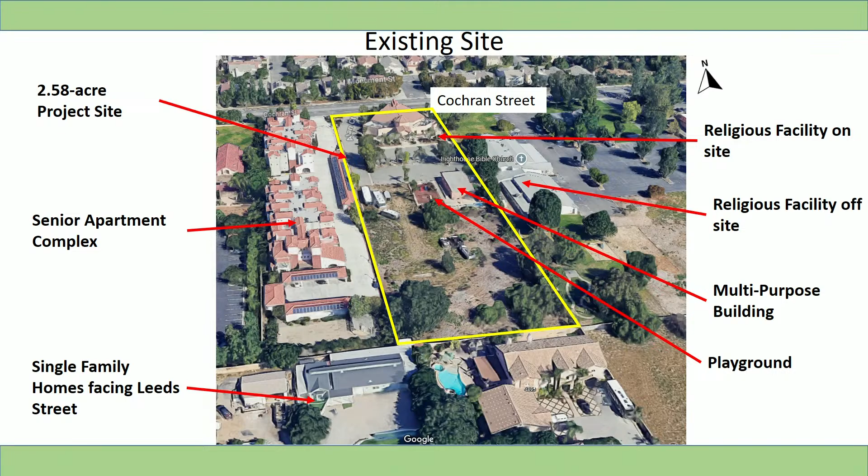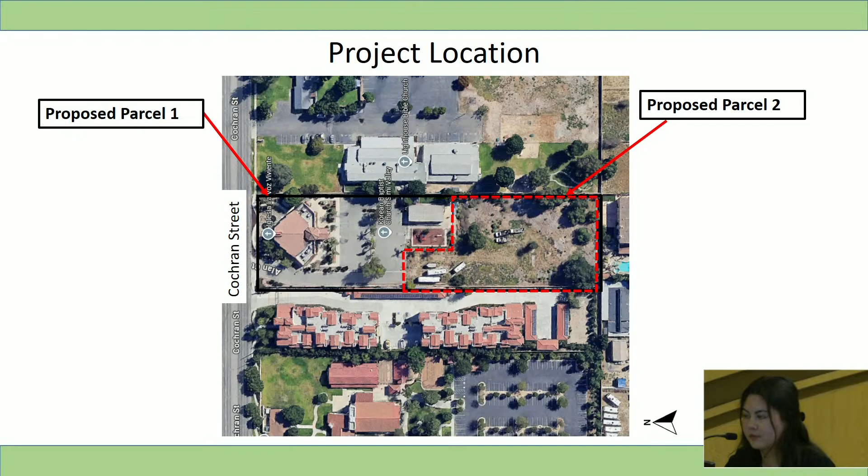The 26-unit townhome community is proposed on the 1.2-acre southern portion of the site, which will be accessed by a shared driveway from Cochran Street. The units will be spread amongst 4 buildings, and a tentative tract map will subdivide the development to allow for the sale of the 26 units.

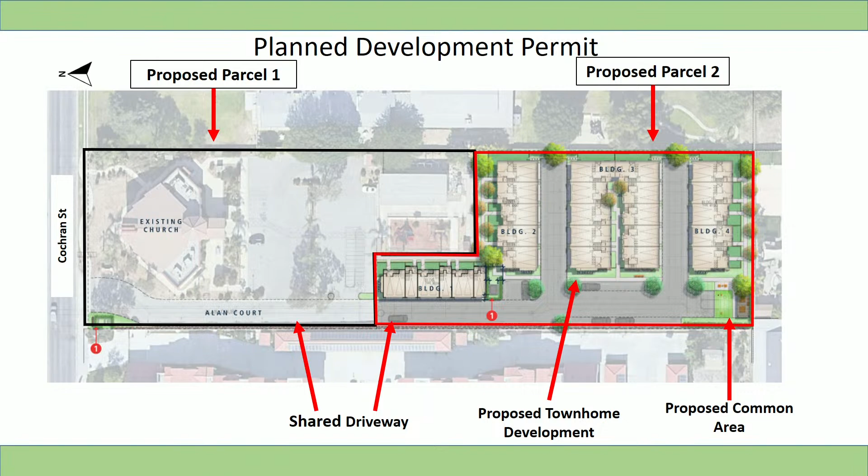The project will also add approximately 11,800 square feet of new landscaping throughout the perimeter of the site, along walkways and within private yards. A common outdoor space will be located at the southwest corner, which will include an active lawn area, barbecue, picnic tables, and benches.

The site currently has 22 mature trees, and 14 of them will be removed, none of which are oak trees. The applicant will mitigate the loss by planting replacement trees of equal value throughout the project site or pay into the city's tree mitigation fund.

The buildings are each 3 stories and 38 feet tall, and the design combines early California and Hacienda architectural styles with red tile roofs and light-colored stucco walls. The design is broken into 2 schemes. Scheme 1 will have darker colored accents under windows and darker colored garages and front doors, while Scheme 2 will have arched doorways and wood-like balcony siding.

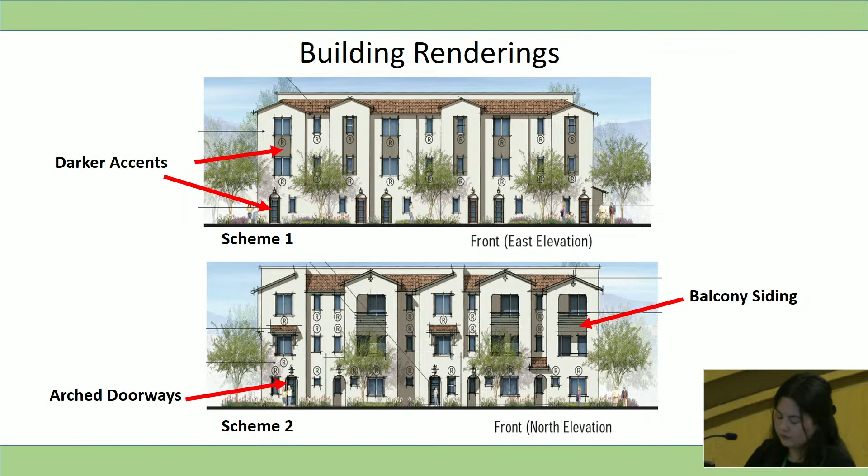The units will be a mix of 1 to 4 bedrooms, ranging in size from 725 square feet to 1,710 square feet, as shown on the table. All 3 of the 1-bedroom units will be designated for qualified moderate-income homebuyers in exchange for receiving a density bonus and development incentives in compliance with state density bonus law.

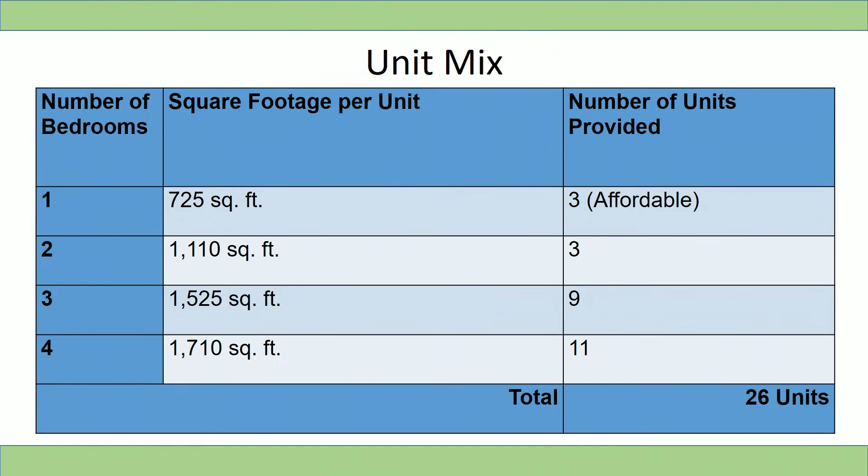The residential high zoning on the property allows 24 units at base density. The applicant is providing 3 affordable units to achieve a density bonus of 2 more units. This also qualifies the project for modified parking requirements, 1 development concession, and multiple waivers, as long as the waivers do not impose a life or safety hazard.

The applicant is requesting the following 6 waivers. The first waiver request is to reduce the required front yard setback from 43 feet to 3.5 feet at the north property line. The required front setback is shown here in blue and the requested in red.

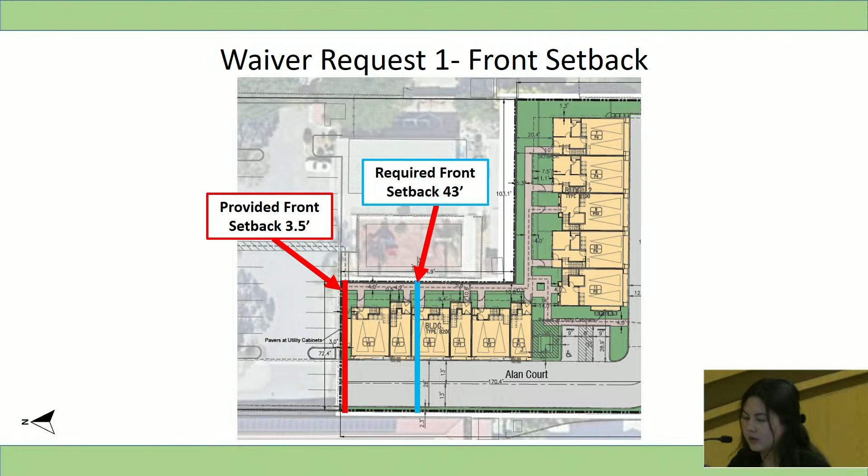The second waiver request is to reduce the required side yard setback from 15 feet at the east property line, as shown in blue, to 9.8 feet, shown in red.

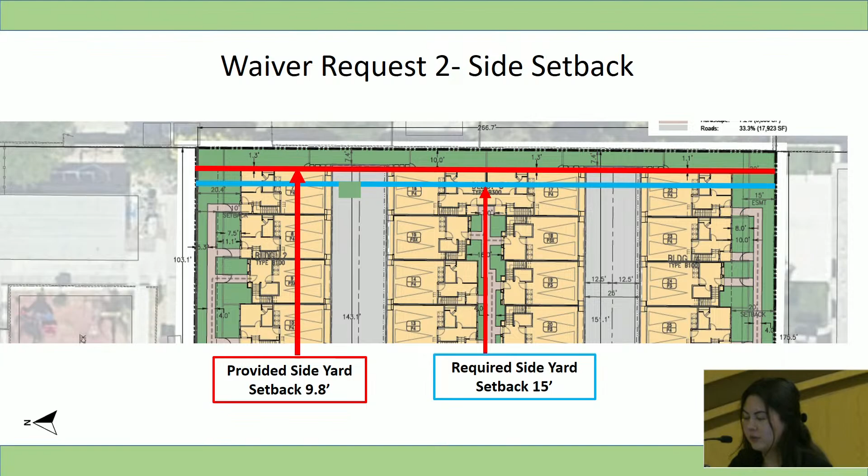The third waiver request is to reduce the required separation between buildings from 20 feet, as shown in blue, to 14 feet, shown in red.

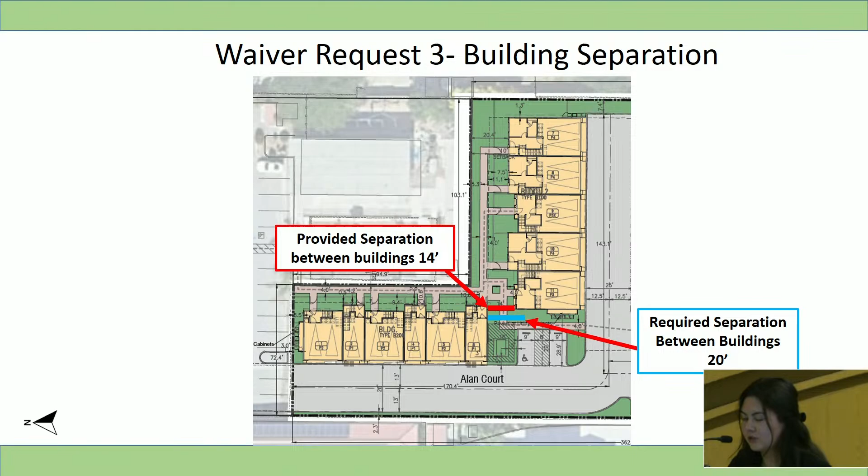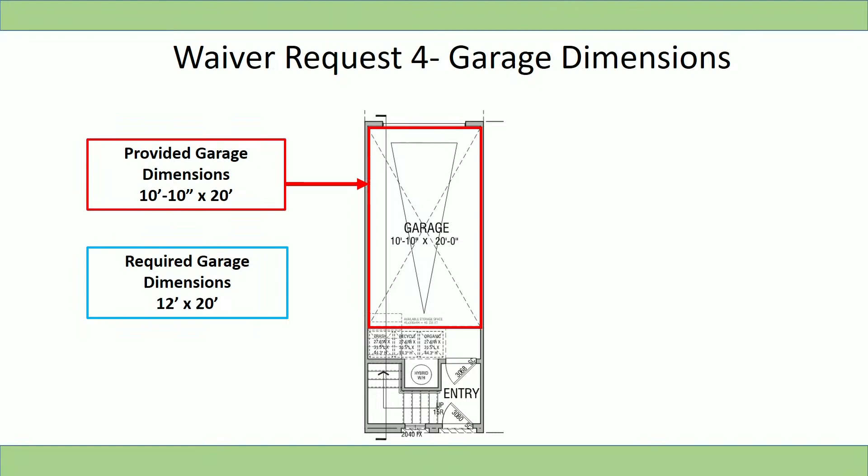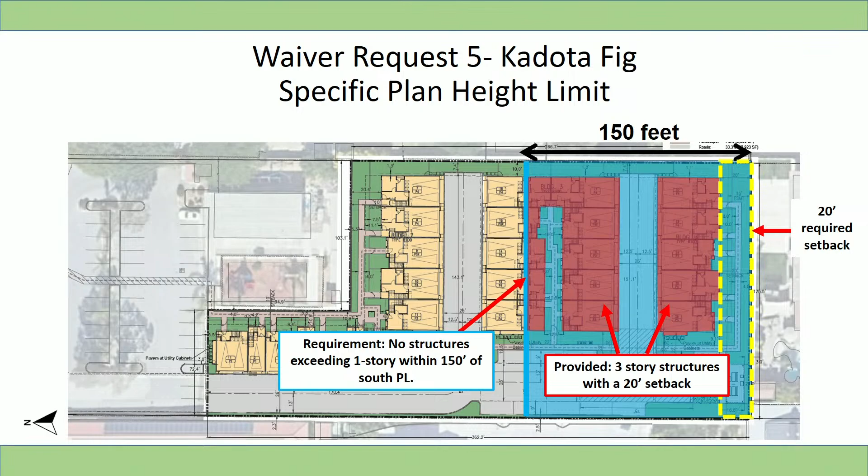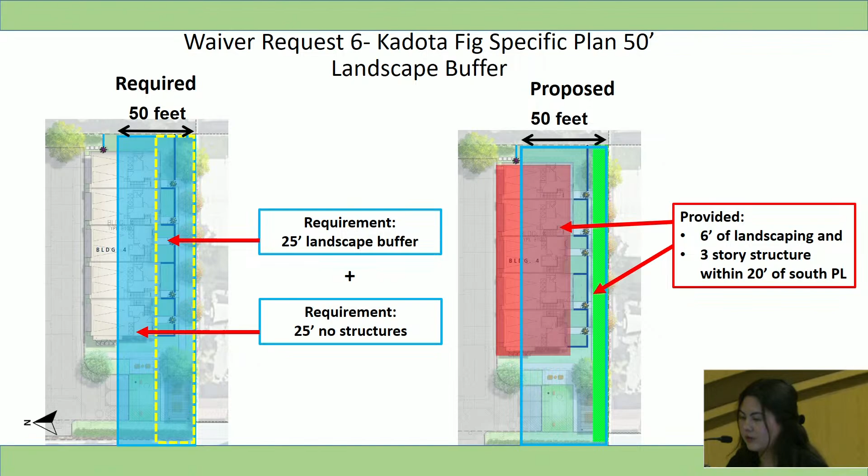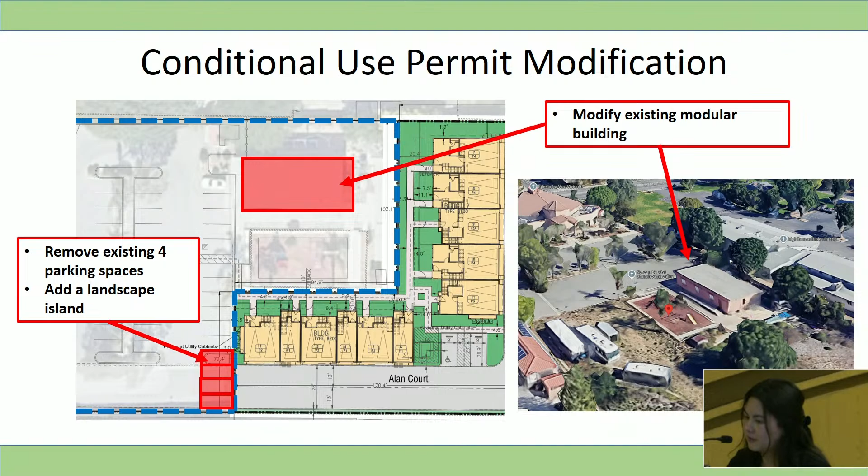The project is categorically exempt from the California Environmental Quality Act pursuant to CEQA Section 15332 for infill development.

We would also like to note that PD Condition A19 on page 31 of the report is not applicable to this project and was left in error. Staff will omit this condition on the resolution to City Council.

Staff recommends that the Planning Commission approve the modification of the conditional use permit and tentative parcel map for the existing religious facility site, and recommend to City Council approval of the planned development permit and tentative tract map for the new townhome development. This concludes staff's presentation, and we are available for any questions.

Thank you. Any questions of staff? Okay, with your permission. Chairperson, can you tell me the distance to the nearest bus stop? I do not have that information offhand, but I can certainly get that to you.

I see a fire hydrant symbol, but I couldn't find the actual fire hydrant on the blueprints. It's probably there, I just didn't see it, so I may have overlooked it. Do you know where it's located on the property? The only reason I'm asking is just the distance from the fire hydrant to the actual site. I know this has to be conditioned through the fire department, but I'm just curious at this point.

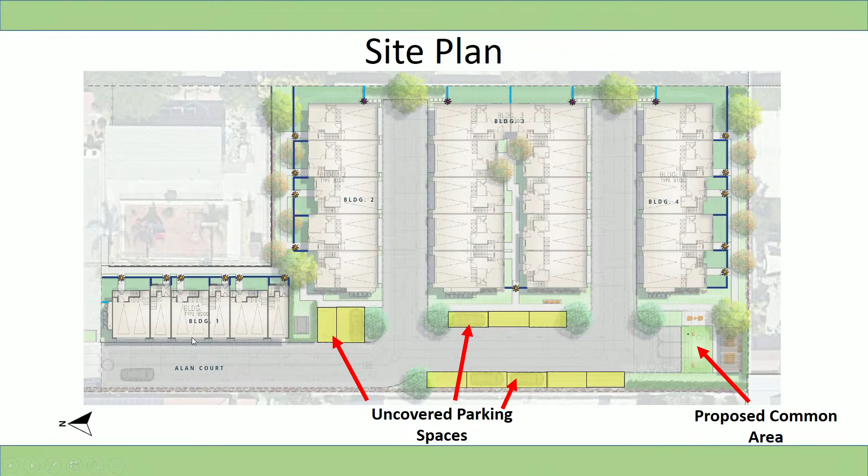We will open the public testimony portion of the hearing. Would the applicant like to present the project?

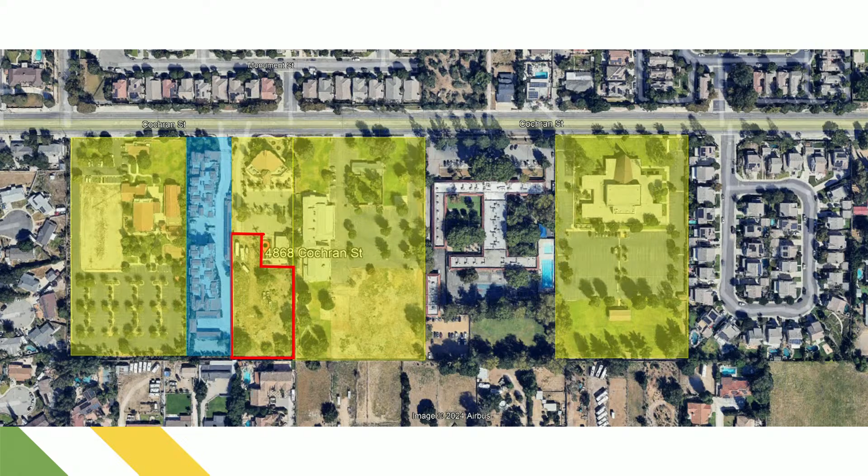Here are a couple of images of the site's current conditions - open land and overgrown shrubs. As mentioned in the report, there are 14 trees that will be removed as part of our development, but there will be at least 14 replacement trees planted throughout the community, along with many other smaller accent trees.

Most of the project details were covered in the staff report, so I don't want to be repetitive. I did want to mention that once the community is completely built out, it will be managed by a homeowners association. All streets, perimeter walls, exteriors of the buildings, roofs, and landscape will be managed and maintained by the HOA.

Here's another image of our site plan, showing the entrance, the building layouts, landscaping, open space, and parking.

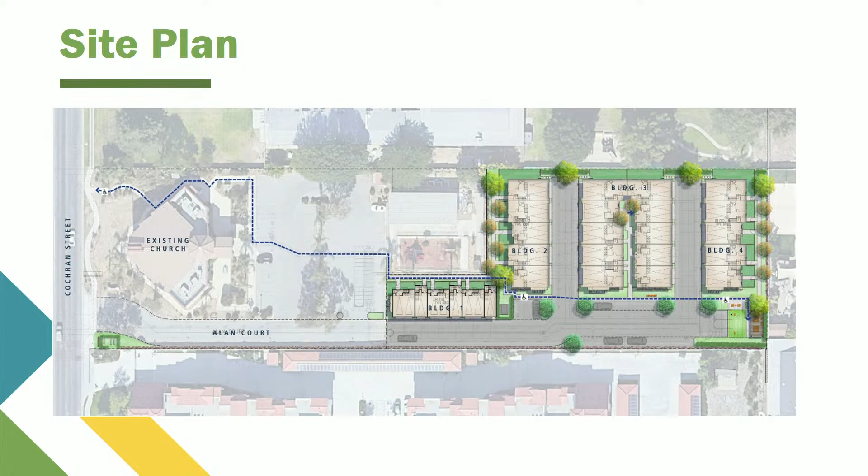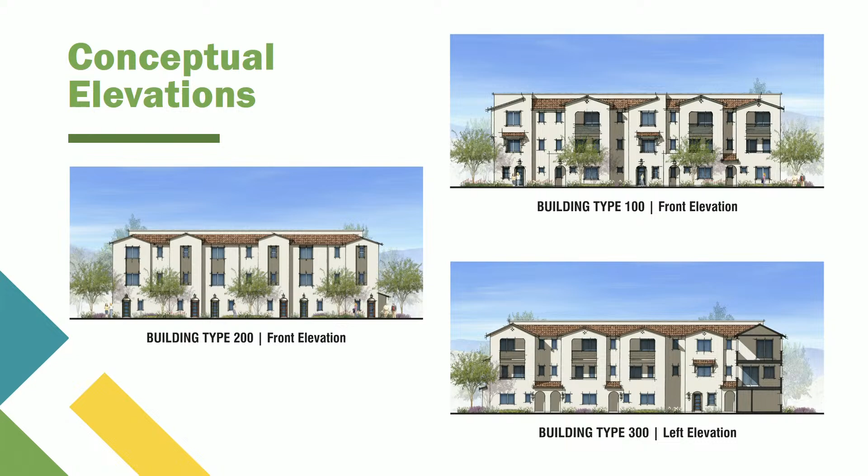Again, this is our typical elevation, a traditional Spanish architecture. The buildings were designed with elevation pop-outs, pitched roofs, and arched entryways, really to try and give it more of the traditional single-family detached home feel.

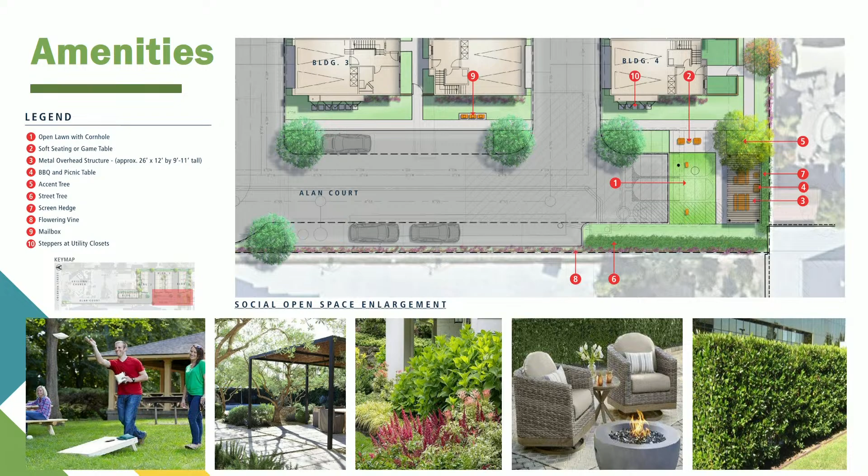This is a close-up of the common open space. This area is intended to give members of the community a place to gather, play with their kids, bring their dogs, and enjoy some time outside. The imagery below helps you visualize what the area will look like.

As I mentioned, as an all-electric home builder, there are many benefits to the homeowner. One of the main benefits is that there will be absolutely no gas to the site, so all appliances will be electric, which reduces overall utility bills. On top of that, solar panels are included with the purchase of the home, so there are no additional leases or payments - homeowners experience substantial savings on their electric bills on day one.

Some other benefits: all garages come pre-wired for EV chargers, drought-tolerant landscaping throughout the community, and every unit comes with Energy Star appliances as part of our standards, so there are no upgrades needed for that.

So with all that being said, it's clear that this project is a positive step forward towards addressing the city's housing needs. It aligns with the city's vision when they updated the housing element to include this site as a residential opportunity, as well as updating their general plan and zoning to residential high in the area. And it's simply a great opportunity to bring another beautiful new home community to the city of Simi Valley. This concludes my presentation. I'm happy to answer any questions.

Thank you. Thank you so much. Are there any questions for the applicant? No?

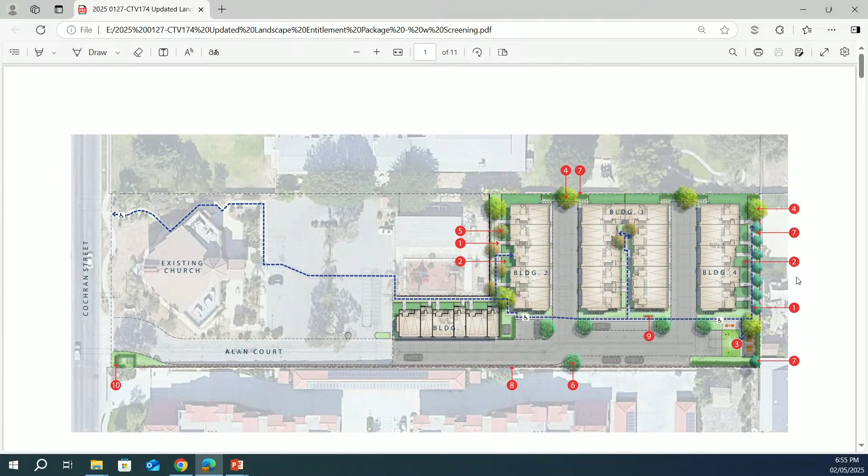And then for the trees, I've been working with our landscape architect because we are conscious of the neighbor to the south. I didn't include it in the presentation because I wanted it to be consistent with the staff report. But she's been working on increasing the landscaping to add as much screening to that southern property line as well. So it's a more dense, taller tree that goes next to the 8-foot screening wall. And that's a year-round type tree, it doesn't go naked in the winter. It's similar conditions to other properties within the area. Thank you.

Any more questions? I have questions. You mentioned there was going to be a charcoal barbecue. I guess this is more of a suggestion, I would strongly advise you against that. I had charcoal barbecues in my HOA, and we had multiple fires started by residents and non-residents because we're not a gated community. With all of the fires happening all the time, I feel strongly about that. But that's, I guess, more of a suggestion.

My other question is, did this project have to go to Firewise board to be approved? So to answer your first question, I might have misspoke, the barbecues are intended to be propane, so they would not be charcoal. And then, sorry, your second question was about fire? Firewise, it's a fire department board or committee that suggests placement of the trees and specific trees that are compliant with fire so that you can actually get fire insurance easier.

So the site is not within a fire zone, but it was reviewed by Ventura County Fire. And as we move through final engineering and construction documents, they also are required to review and approve those plans. So they would get full access to all the types of trees, building materials, and we would take any advice that they have. Thank you.

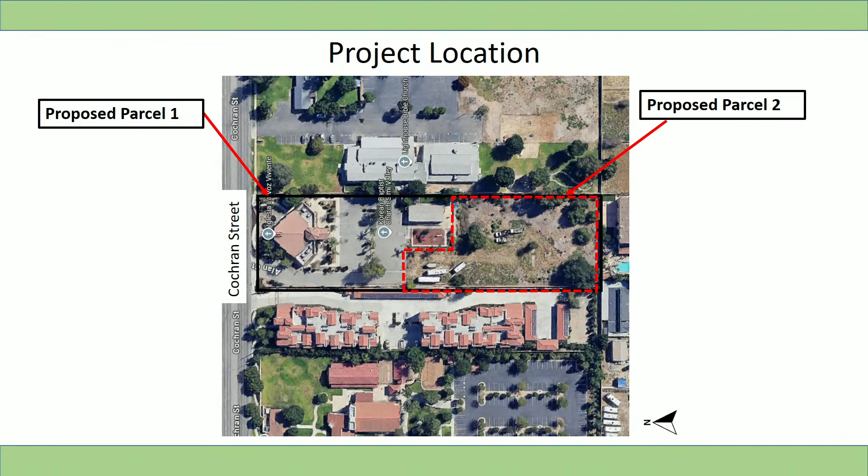The request on the east side is a 9.8 feet density bonus waiver to decrease the street side yard setback. I'm assuming we can't just shift the buildings over to increase that because we have the driveway concern on the west side? Okay, that's kind of what I thought, but I just wanted to be sure.

That's my only question at present. Thank you.

I have a little bit of concerns with the setback too, especially when it's going to maybe impact their privacy. And maybe we can see what we can do with the signs on the street so that we can coordinate the traffic and not have collisions.

I still strongly suggest not having a barbecue at all. That's just my opinion, but the kids can enjoy a swing or something else instead of something that can possibly create a very big hazard for the whole city, not just one community.

I like that the roof has solar, and that the roof, from what I read, was going to be maintained by the HOA. I like that part.

I do have a concern about the private driveway because it's so long, and in case of any emergency or fire, that could be a liability. I understand that it's all legal, but that's just my opinion.